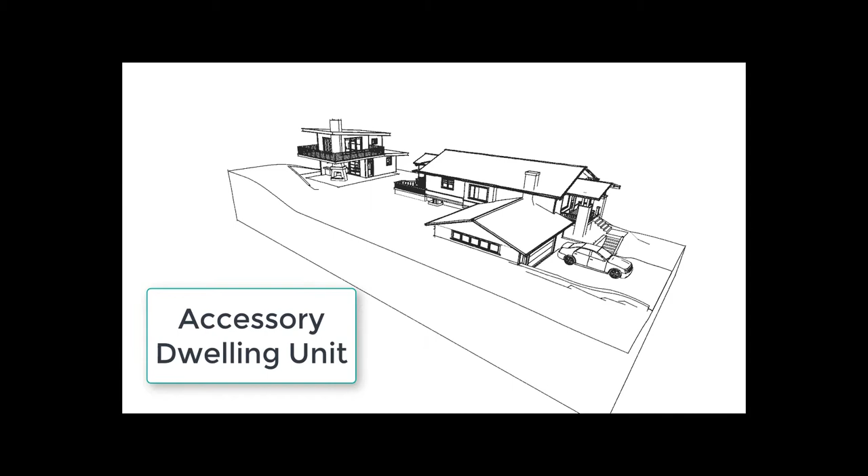Our initial ADU design was focused on removing the existing backyard utility structure and using that location for the new ADU. After reviewing the 3D modeling, it was apparent that any two-story structure in that location would overpower the existing house as well as occupy prime backyard flat space.

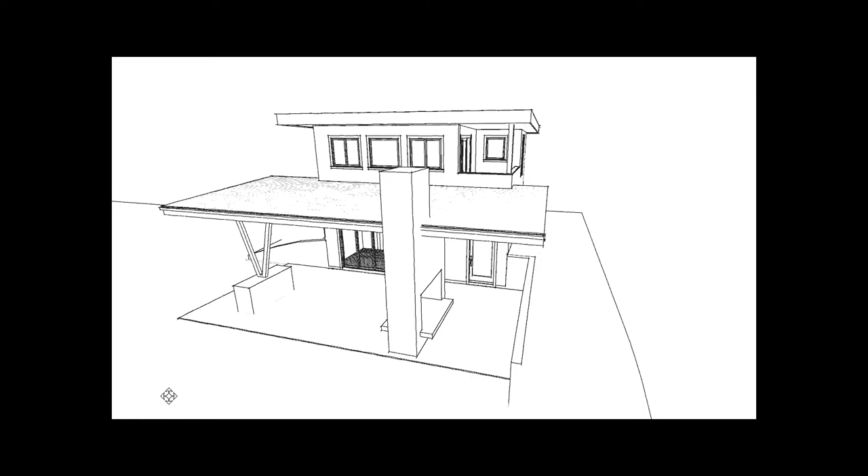With that in mind, the new ADU conceptuals are designed to be tucked into the hillside of the southwest corner. Again, I'll mention that I am keeping this presentation visually simple in order to emphasize the general structure shape and organization. I'm showing no textures, materials, or colors. I'll also say that almost any of the prior designs can be adapted for this location. Here I have two pair of different conceptual versions to consider.

From the start of our design exploration, a big priority has been to create an outdoor living and entertainment space. We have talked about an outdoor fireplace, integrated seating, and outdoor cooking, and the patio roof having an exposed beam ceiling. In my opinion, the materials and style of any patio ceiling can really set the tone of the experience. I want to start with how the four conceptual designs integrate with the patio, specifically the patio ceiling.

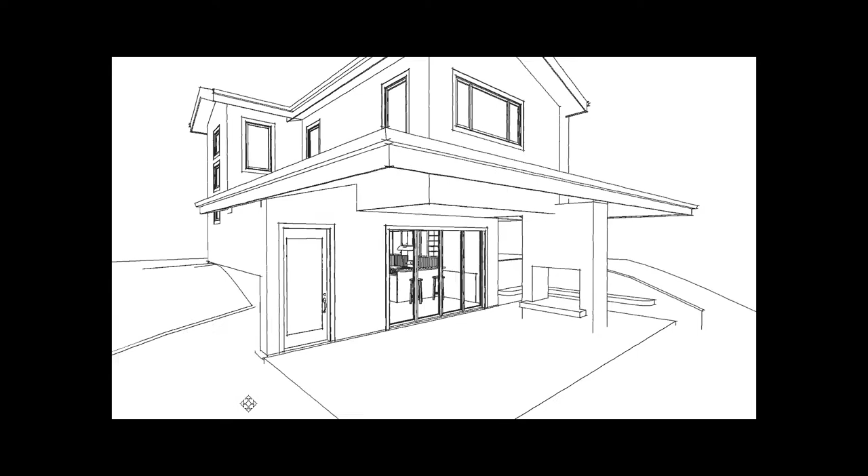The first pair were a mirror image, but with deck locations to the east or to the west. We have achieved a covered patio area by projecting the upper level forward and skirting it with a hip roof. I really like this look from the outside. In 3D and in section, it becomes obvious that this shape of exposed ceiling might be awkward. From a practical structural perspective, it will necessitate a flat ceiling. I have given this a lot of thought, and I am confident we could make it work.

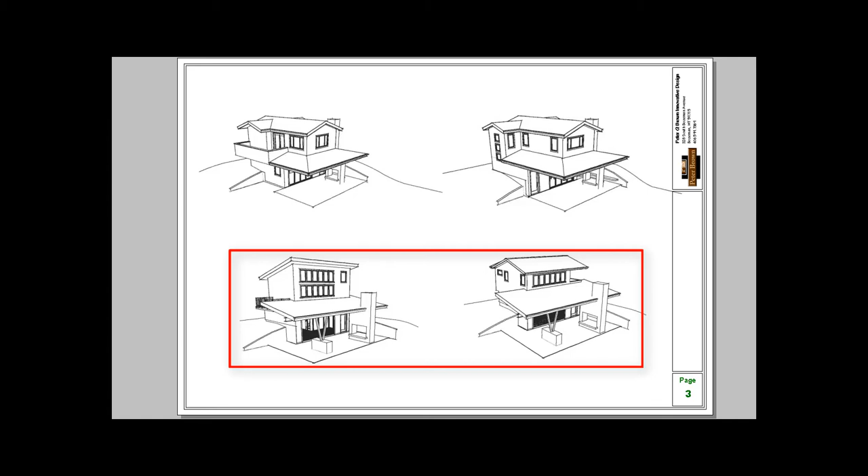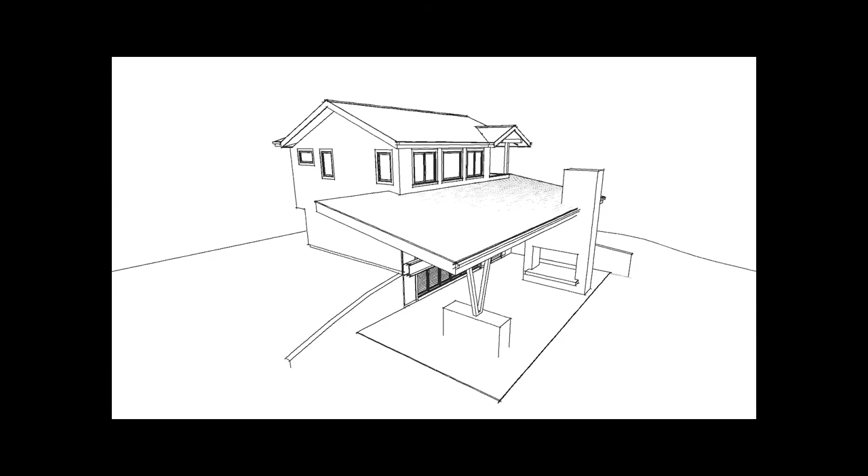These third and fourth conceptual designs are again similar, but differ in roof line and deck location. The first is an upper level shed roof with the deck to the east, and the second is an upper level gable with the deck to the west. This second design concept works well for a number of reasons. This deck location is a bit more private. The overall roof line is subtle and less obtrusive over a backyard we are trying to protect. And it's also conducive to an attractive as well as a relatively cost-effective patio roof.

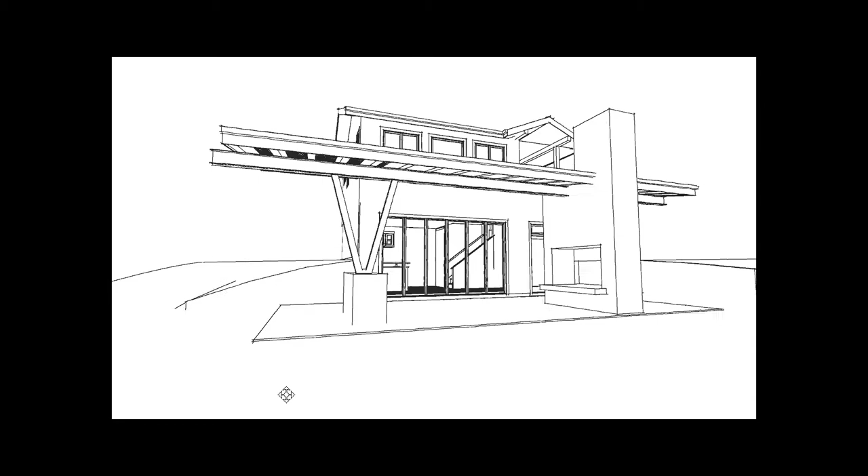In section, you see the upper and lower levels line up, and our outdoor patio space is under one continuous shed roof. I'm using our double-sided fireplace as a beam support on one end. I have a number of ideas for an artistic steel, almost sculptural support at the opposite end. This ceiling design can easily be an uninterrupted exposed beam ceiling of wood, steel, or a combination of both.

Now with all these designs, we are splitting the available 600 square feet about equally between levels. The first level has a full kitchen and opens up to the patio with folding glass doors. The second level gets a full bath, a Murphy bed, office furniture as needed, and a deck.

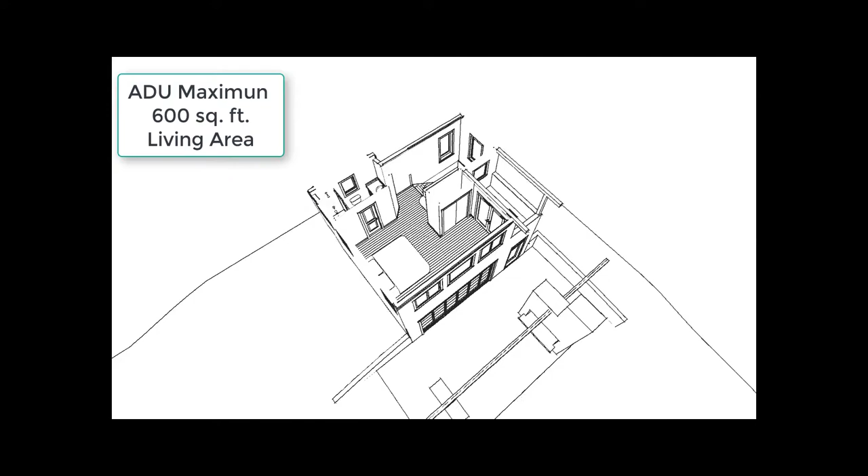So once we finalize the structure and layout, we can really define the look of the building as we explore our options for windows, roofing, and exterior finish materials.